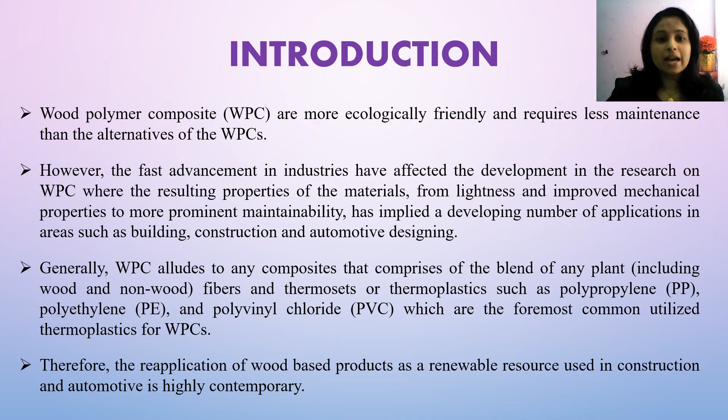Generally, WPC alludes to any composites that comprise a mixture of any plant, including wood and non-wood fibers, and thermosets or thermoplastics such as polypropylene, polyethylene, and polyvinyl chloride, which are the most commonly utilized thermoplastics for WPCs. Over the past decade, in the course of current global challenges with respect to carbon dioxide emission and climate change, the concept of green environment has become more mainstream. Therefore, the reapplication of wood-based products as a renewable resource used in construction and automotive is highly contemporary.

Currently, WPC are well established and the market is ripe for non-structural application, but recently researchers have been working to expand the use of WPC in structural applications. Although the research and development in WPC is growing rapidly, these materials still require specific considerations before being adopted by industry in structural applications.

Firstly, since the material's deformation mechanism under short-term and long-term mechanical loading is not always the same, and the tensile test alone is not sufficient to predict their long-term load-bearing application, for safe fatigue design the study of fatigue behavior of the composites is very important, particularly if the rubber-wood polymer composites are used in long-term load-bearing applications. Next, since the mechanical properties of WPC change rapidly in a humid environment, the study of hydrothermal aging is also crucial in determining the durability of WPC.

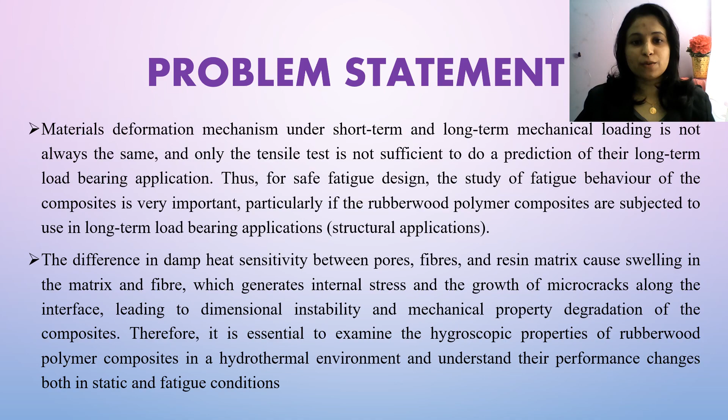For example, the difference in damp heat sensitivity between pores, fibers, and resin matrix causes swelling in the matrix and fiber, which generates internal stress and the growth of microcracks along the interface, leading to dimensional instability and mechanical property degradation of the composites. Therefore, it is essential to examine the hygroscopic properties of rubber-wood polymer composites in a hydrothermal environment and understand their performance changes both in static and fatigue conditions.

Moving on to the scope, this study focuses on the influence of hydrothermal aging on the fatigue behavior of natural composite materials. The materials consist of rubber wood fiber reinforced with recycled polypropylene. Water aging duration will be up to 90 days at room temperature. Fatigue testing will be conducted in force control at 4 Hz till failure. Mechanical properties will be observed on strength, rigidity, and energy absorption due to hydrothermal effect.

Meanwhile, the objectives of this project are: first, to evaluate the static properties of WPC after water aging; second, to compare the fatigue life of the non-aged and the aged WPC; and lastly, to evaluate the effect of water aging on fatigue properties of WPC.

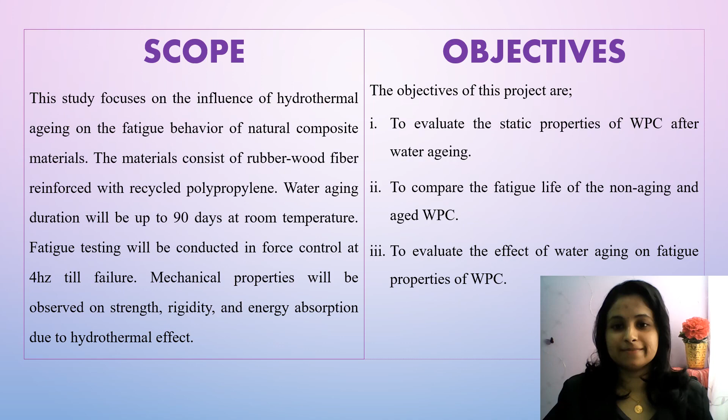Firstly, Moreno and Saron in 2017 stated that WPCs can be produced from environmentally friendly materials such as wood fibers, unused natural resources, and recycled thermoplastic resins. Meanwhile, Wei Wang in 2020 stated that the tensile and flexural strength of wood powder reinforced polypropylene composites with soaked moisture content basically depended on the polypropylene matrix, and wood powder had a small strength impact on the matrix.

Next, M. Pollanen in 2013 mentioned that incorporating new additives and coupling agents such as recycled polypropylene within the wood thermoplastic matrix led to better adhesion between the polar hydrophilic wood fiber and the non-polar hydrophobic thermoplastic components, and subsequently improved the mechanical properties of WPC.

Besides that, an experiment conducted by Chainarong Srivabut in 2017 with WPC samples using rubber wood fiber as a function of contents of nanoclay, talcum and calcium carbonate as fillers showed that calcium carbonate at 7 weight percentage of composite had the highest mechanical properties, and the water absorption and thickness swelling of composite samples decreased by adding chemical fillers, which is calcium carbonate.

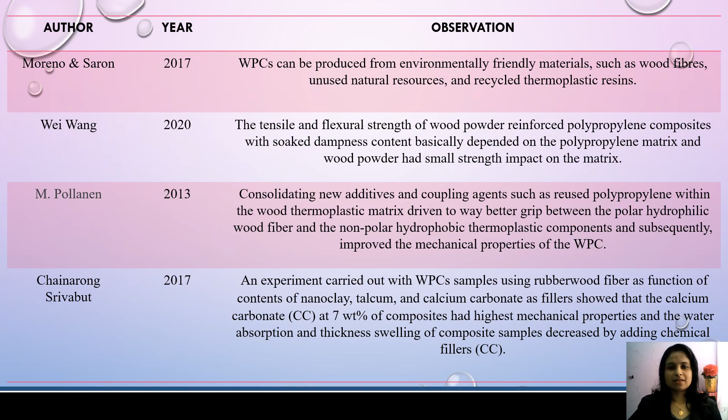Moving on to the next, Michael P. Wolcott in 2010 said that it appears that the coupled wood flour PP composites perform superior and show higher reliability index than their uncoupled counterparts due to improved interfacial bonding between wood flour reinforcement and matrix polymer within the coupled composites. In addition, Silvia Bettini in 2011 proved that the compatibilized 30% coir fiber reinforced PP composites displayed longer fatigue lifetimes compared to pure PP or non-compatibilized composite.

Followed by that, in 2019, she also stated that the feasibility of pulverization of wood flour on the fatigue performances of polypropylene/wood flour composites depended on the initial wood flour particle characteristics. Next, Vauthier in 2010 mentioned that the hygrothermal defects made in the bulk composite during the water sorption step initiated a critical decrease in fatigue properties, particularly after aging in immersion. These overall losses of properties were linked to the drop in the measurable dispersion of the fiber strength after aging.

Lastly, an experiment carried out by Li and Xue in 2015 showed that after 17 weeks of immersion of WPC at 60 degrees Celsius, their results show a decrease in the tensile strength of roughly 15% for the water-saturated material and of around 37.5% for the aged and dried sample.

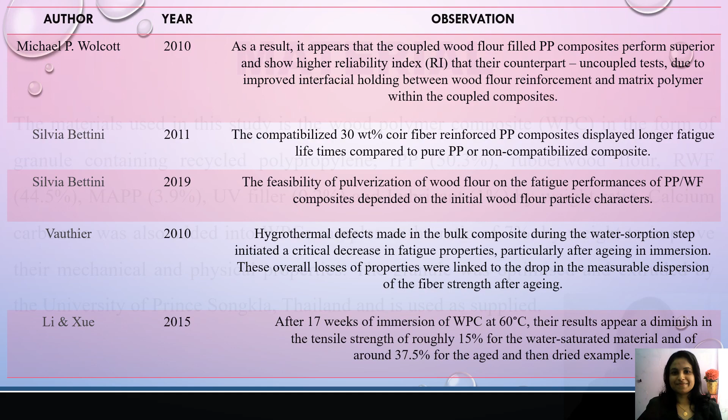Now, moving on to the materials. The material used in this study is the wood polymer composite, WPC, in the form of granules containing recycled polypropylene about 50.3%, rubber wood flour about 44.5%, MAPP about 3.9%, UV filler about 0.2%, and lubricant about 1% by weight ratio. Calcium carbonate was also added into the WPC sample at the ratio of 7% by weight to improve their mechanical and physical properties. The granule was optimized and extruded by the Prince of Songkla University, Thailand, and is used as supplied.

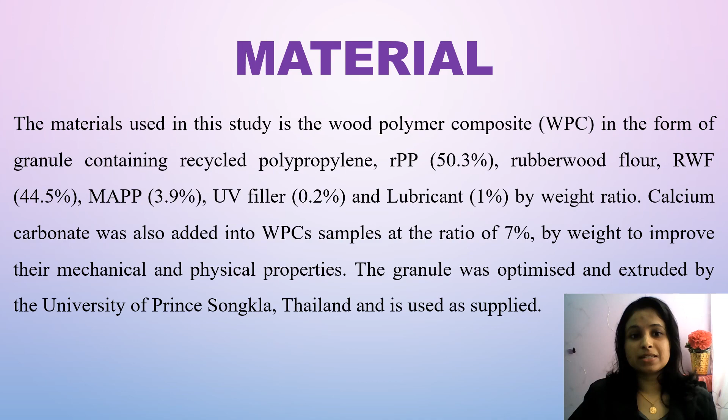Next up is the methodology. The process flow of the research methodology used in this study is as shown below. First, sample preparation. Several sets of dog bone specimens will be prepared, where 8.22 grams of WPC granules will be compressed at 190 degrees Celsius. Constant pressure of 2 tons is given for 10 minutes, 7 tons for 15 minutes, and cooling for 10 minutes. Then, hygrothermal testing. 5 specimens will be used for hygrothermal testing, referred to as aged, for up to 90 days in distilled water, while another 5 specimens act as control and are referred to as non-aged.

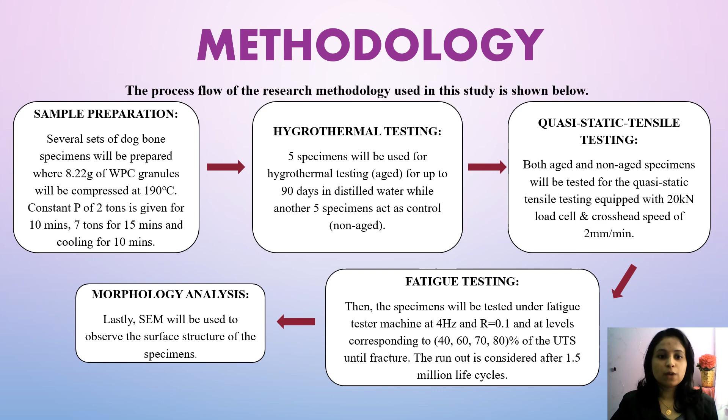Next, quasi-static tensile testing. Both aged and non-aged specimens will be tested with a 20 kN load cell and crosshead speed of 2 mm per minute. After that, fatigue testing. The specimens will be tested under a fatigue tester machine at 4 Hz and R equals 0.1 and at levels corresponding to 40, 60, 70 and 80% of the ultimate tensile strength until fracture. The run-out is considered after 1.5 million life cycles. And finally, morphology analysis, where SEM will be used to observe the surface structure of the specimens.

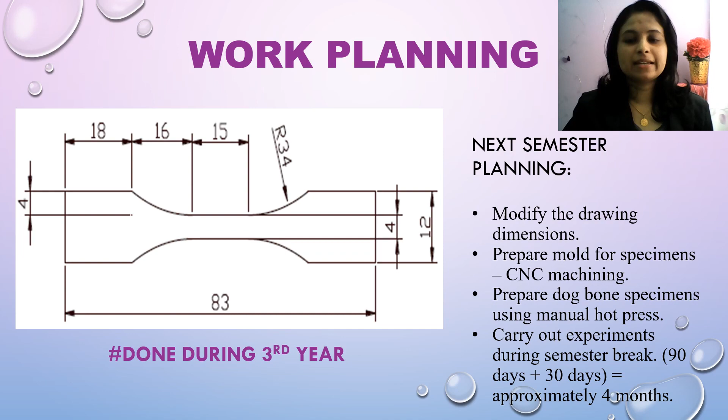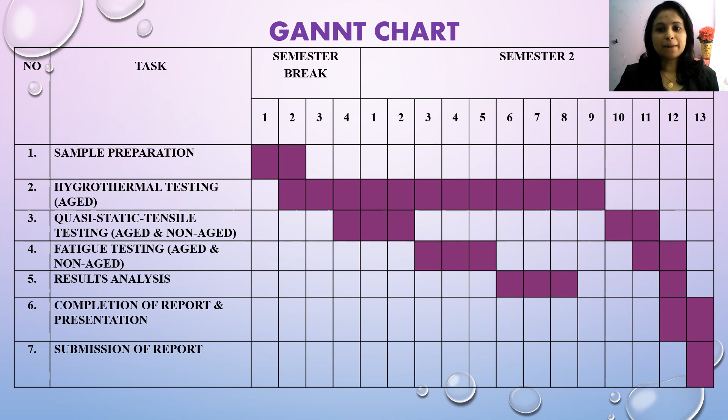Last but not least, the problems and solutions. The problems that I might face throughout the completion of my final year project are, first, time consumption and availability of equipment. And the only solution is to start early during semester break, because when I start early, I can finish up my experiments early and spend more time on the discussion and analysis. Moreover, I don't have to wait for my turn to use the equipment in FKP next semester. In that way, I can save time and reduce last minute stress.